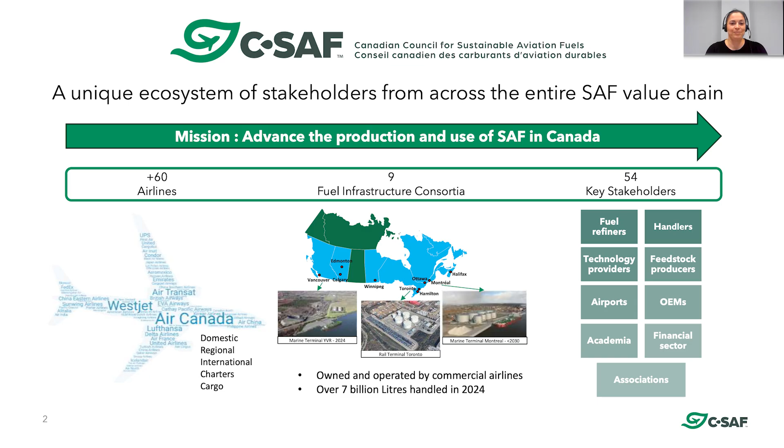So we have what we call our SAF policy North Star, composed of 4 pillars. The first one, obviously, is reducing aviation emissions. In order for aviation to reach net zero goals by 2050, we really need to use SAF, and industry reports have said that at least 65% of emissions will be reduced through the use of SAF.

Our second pillar would be, obviously, to make it here in Canada. We feel we have all the right ingredients, all the right feedstocks, in order to make it. Also important is to keep the sector competitive. I'm sure you're well aware that SAF is more expensive than regular jet fuel—it could be 2 to 5 times more. The airlines obviously don't want to pass on those costs to their consumers, so we want to ensure that any sort of policy revolves around trying to keep the cost competitive.

And finally, activating Canadian feedstocks. That's what the webinar we had yesterday was about, and if you want to know about all the feedstocks we have here in Canada for SAF, you're more than welcome to listen to that recording as well. So that, in essence, is what we're trying to achieve.

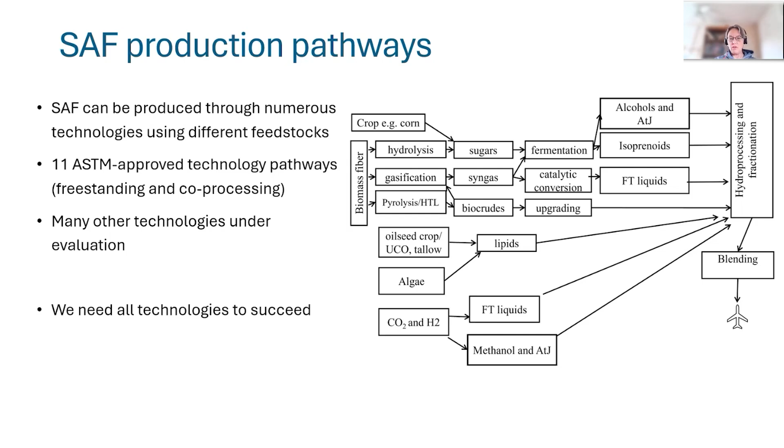So there are numerous technologies. We do have these complicated graphs, but it doesn't even tell the whole story because there's ongoing development of new technologies, and there aren't any winners. We need all technologies to succeed. These are the ASTM approved pathways, and later on I will show you some of the emerging pathways.

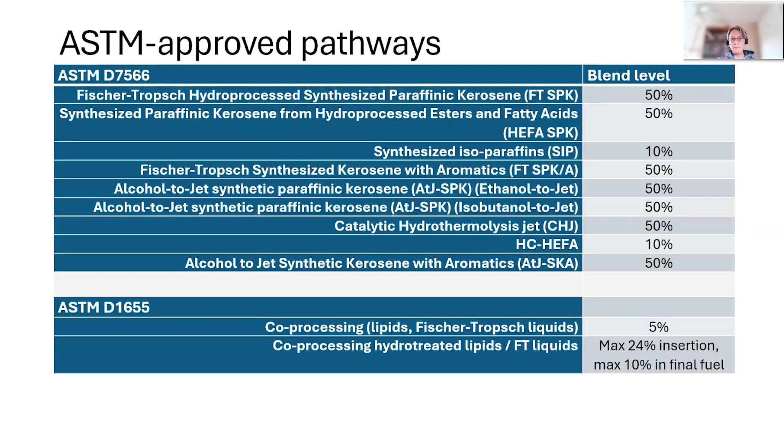I wanted to speak a little bit about technology readiness and commercialization, because ASTM approval is not an indication of commercial status or the sustainability of a pathway. What we see in the SAF sector globally is that it's taking longer for companies to reach commercial status, and we know it has to progress from R&D, pilot, demo, to commercial.

But the timeline, I think people overestimate how quickly this can be done. Usually you would take between 2 and 3 years per stage. And then, often reports start counting capacity based on announcements, but the timeline and complexity in the steps actually takes much longer.

Just as an example, the Fulcrum facility already announced in 2006 or 2008 that they were going to build this facility. So that gives you an idea. Then apart from getting the funding, etc., going to FID, the construction periods can be very long, especially for facilities such as gasification.

So there's also the announcements versus FID. And then we talk about commercial scale, but there's a difference between a first of a kind facility, the pioneer, and fully commercial, the nth facility.

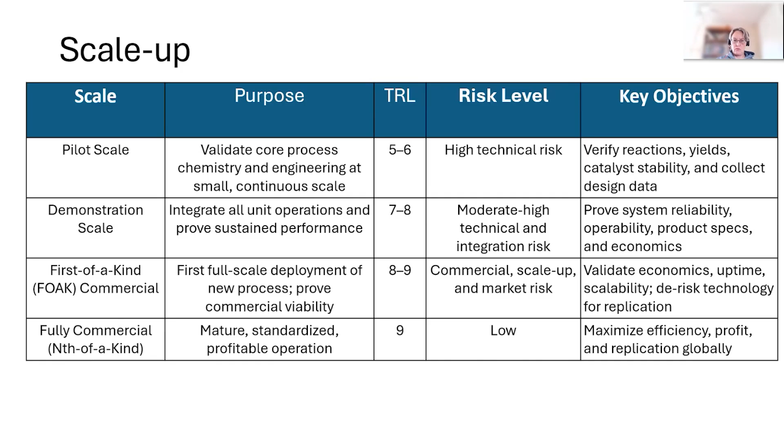If we just look at scale up and these different levels, a first of a kind facility, I do not call it fully commercial because it's still proving the commercial viability. Fully commercial is really at the nth stage, where you have a mature, standardized operation, and the risk in terms of obtaining financing is also very, very different.

And what we also have to bear in mind is that a pathway consists of different processes, and individual process steps may be novel and at different TRL levels. And not only do the individual processes have to be demonstrated, the integration must be demonstrated. And if there's a step that is a lower TRL than others, we would usually assess it at the lower TRL because there's also an integration readiness and a system readiness level that should be evaluated.

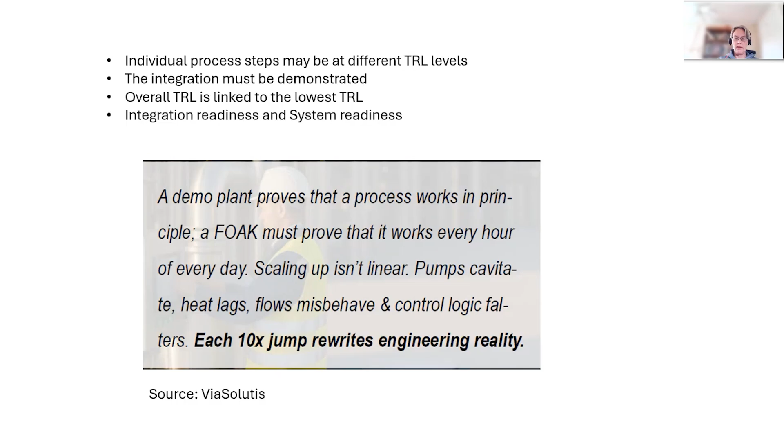And I saw this quote the other day, which is very appropriate. And it said, a demo plant proves that the process works in principle. But the first of a kind must prove that it works every hour of every day, and the scale up isn't linear. And sometimes we forget, financiers, venture capitalists, they put a lot of pressure on these companies to do it as fast as possible. And that kind of is something we have to be cautious about.

So I'm going to talk a bit about the technologies, but not going to go into a lot of detail. You'll be able to get the slides afterwards. The only technology that's currently fully commercial is the HEFA SPK from oils, fats, and greases. But while we say it's fully commercial, it's mostly for production of renewable diesel, not for SAF. SAF can consist of a small fraction of the products, but not every facility produces SAF. I think I mentioned yesterday that there's about 20 billion liters of global capacity for HEFA refineries, but there's only 1.3 billion liters of SAF produced from that 20 billion liters. There are big challenges with feedstock cost, availability, and sustainability.

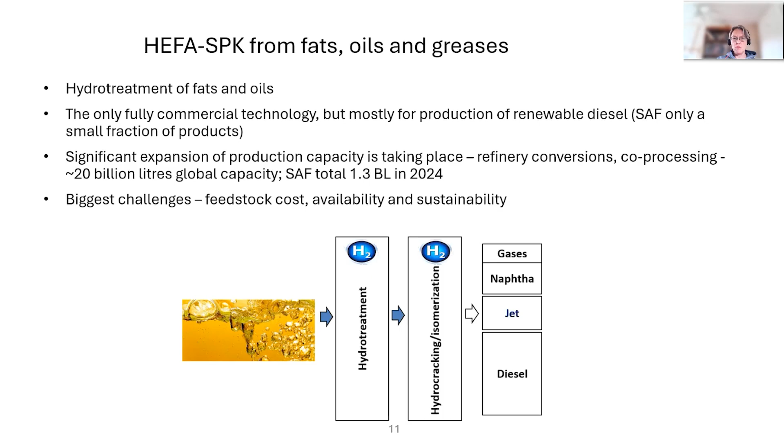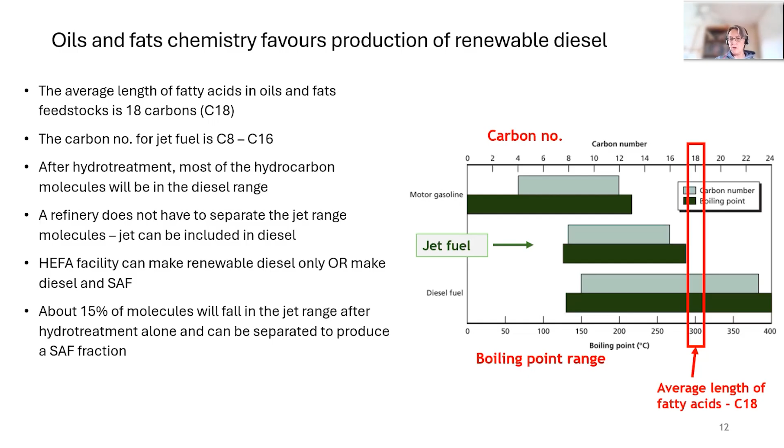But if you want to produce a bigger volume of SAF, you can crack these molecules to make smaller molecules, and then you will have a bigger jet range. But the traditional thing is that you will then lose about 10% yield, so it's only if the economics is favorable that you will do that. And that economic driver will come from the policy, because there's policies all over the world for diesel blending, but not necessarily for SAF. And there are incentives for diesel and renewable diesel blending. And therefore, it's more favorable for companies generally to produce diesel rather than SAF. So I just wanted to clarify that.

So HEFA still has a lot of potential, but the challenge is the feedstock. So if we want to make more SAF, the first sort of low-hanging fruit is increase the SAF fraction, bring in policies that address this competition between renewable diesel and SAF so that we can produce bigger SAF volumes. We also have the opportunity for co-processing, which is also a low-hanging fruit. But again, I'll show you with co-processing that it's the refineries in Europe that are producing SAF with co-processing because of the policy environment there.

So we have the oils and fats feedstock, but they are very expensive. Used cooking oil has been going even above the price of rapeseed oil, and feedstock cost is about 80% of OPEX. So this feedstock cost therefore presents a challenge in terms of the final production cost. And while we have low carbon intensity feedstocks in waste oils and fats, there's only about 30 to 40 million tons. Plus, there's competition not only with renewable diesel, but also with biodiesel.

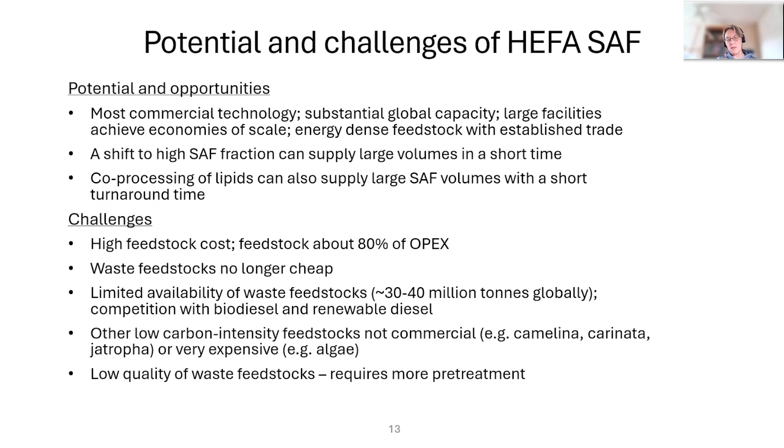So we can use crops such as canola and so on, but there is an opportunity to increase low carbon intensity feedstocks based on cover crops, intermediate crops, such as Camelina, carinata, or crops that can grow on marginal or degraded land, which means that there's no ILUC value attached. So co-processing fits in with the HEFA pathway because this is already fully commercial.

So basically you take your oils and fats and you can insert it in various places within your refinery: hydrotreater, hydrocracker, or even the fluid catalytic cracker. But you'll remember yesterday when we talked about the CORSIA defaults, there's only a default pathway for the hydrotreater or the hydrocracker, not for the FCC. And currently the ASTM limit for the volume that you can insert is only 5%, unless it's already hydrotreated, and then you can put in up to 24%, but still you only can get 10% in your final fuel.

And some of the things that come in here from the sustainability perspective is that the biogenic content in the final jet fuel, the final SAF, has to be demonstrated. And while you can use mass balance and so on, CORSIA determines that there has to be carbon-14 analysis built into that to verify the blend. And only the biogenic component is considered SAF.

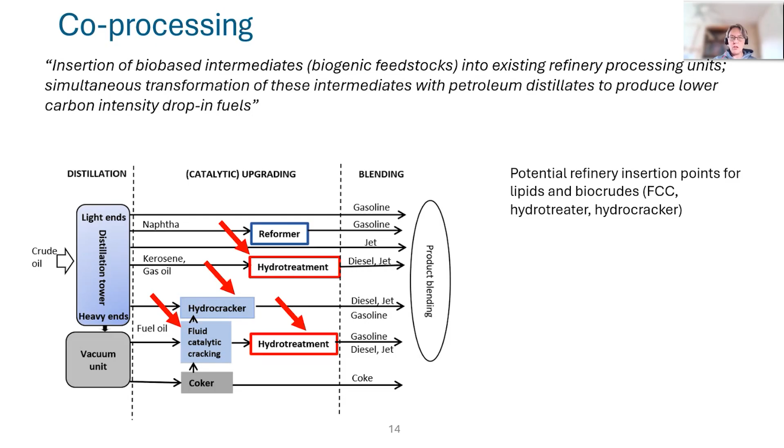So there's a lot of potential for co-processing because there's a much quicker implementation because the refinery is already there, the processes are already in place. It might just be changing the catalyst, building storage capacity, piping, and maybe pre-treatment capacity. So this is a very quick way to produce SAF. The other reason why it's mainly in the EU is because a lot of facilities in North America have been co-processing for a long time, but at much higher volumes than 5%. So dropping back to 5% is not necessarily an economically viable process.

So in Canada, just to link this back to Canada, co-processing is extensively carried out in BC at the Parkland refinery, mainly in the FCC, but also a little bit in the hydrotreater. And then the Tidewater Midstream facility in Prince George does co-processing. And then a full HEFA facility is the Tidewater Renewables facility in Prince George, but they are only producing renewable diesel. They want to expand to SAF production, and they have not yet gone to FID on that process.

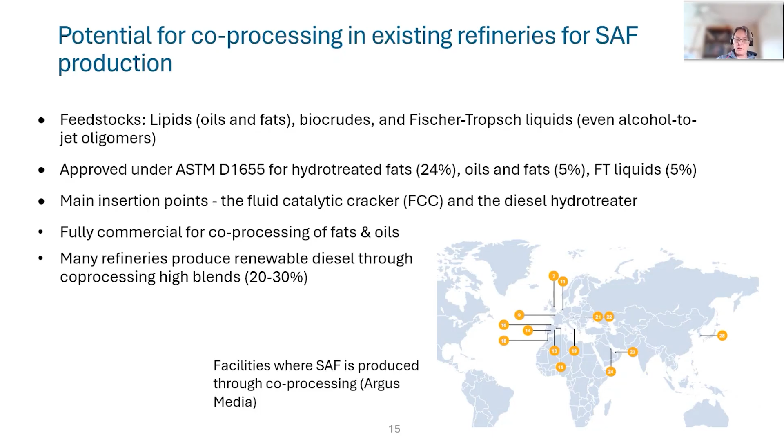Then gasification. So we looked at the feedstocks yesterday, and gasification is very, very promising in order to utilize a lot of the feedstocks. Here I've got forest residues and MSW, but it can also use ag residues and so on. The basic process is quite known, but what we do know is that gasification is fully commercial for generating heat and energy, and Fischer-Tropsch is fully commercial for producing products from gas, natural gas, and coal, but not from biomass. And so it's that integration that is the problem, because the biomass produces tars, the syngas cleanup and the ratio, all of that becomes more difficult when you're looking at bio-based feedstocks.

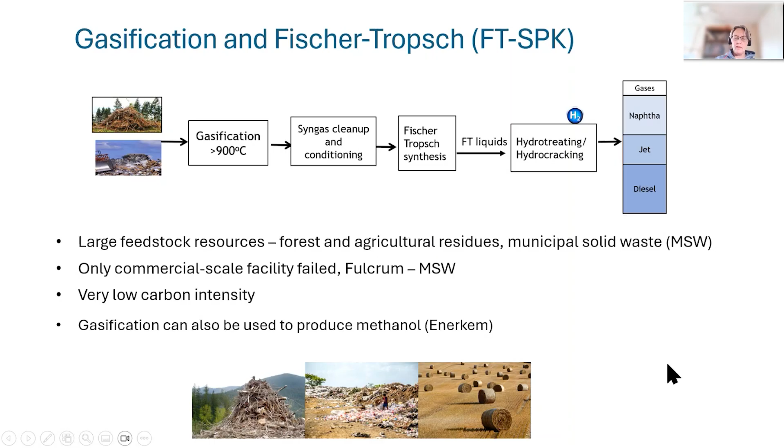But it's critical that this technology must be commercialized because we have vast feedstock resources that other technologies cannot readily utilize. But the problem is that it's still not commercial. The first of its kind facility, Fulcrum, using MSW, closed down earlier this year. And so that is very disappointing, but that means there's now a greater risk for this technology. But it can produce very low carbon intensity. And the alternative to Fischer-Tropsch is to produce methanol and then use the methanol-to-jet conversion process.

The difficulty is that the capex is very high, anything from greater than 1 billion to 4 billion US dollars. There is complexity with syngas cleanup, and there are huge differences with feedstocks. If you look at the Fulcrum facility, there wasn't a lot of information available, but one of the things was that they had a 10-foot layer buildup of cement-like material in their gasifier. And this is likely to be due to high ash content in MSW that can be up to 24%, and not necessarily controlling the moisture in the feedstock, which then creates this environment that was problematic. They also had problems with nitric acid forming because of the feedstock characteristics.

So it is very critical that you have strict feedstock specifications, not just for size, but for moisture content, and that the contaminants are removed or clearly known, so that piping and so on is of the standard or quality that can withstand the type of corrosion that you might experience. So yesterday someone asked about the yields. I said 18% distillate per ton.

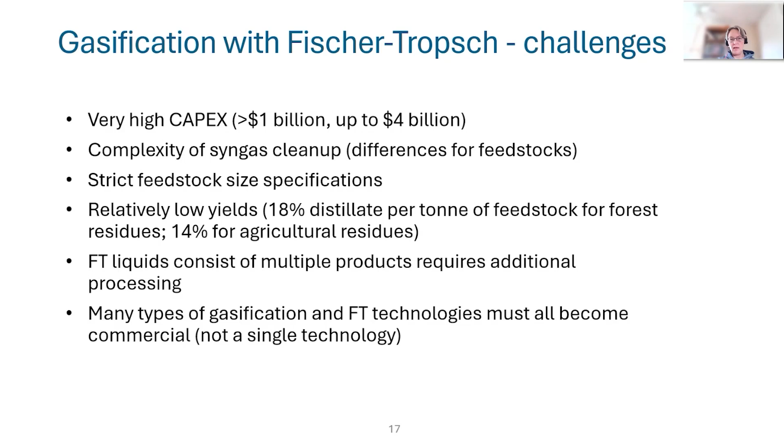So alcohol to jet, it doesn't have that much potential in Canada, but direct thermochemical liquefaction does. And this is three basic processes: fast pyrolysis, catalytic pyrolysis, and hydrothermal liquefaction. And at UBC, we've been looking at this process and thought this has a lot of potential as far back as I think 2014, and we've done various projects funded by Boeing to look at this.

You produce this liquid intermediate and then you have to upgrade it. So the liquid intermediate, I think you're probably not seeing my pointer. The liquid intermediate, this is for fast pyrolysis at commercial level, HTL not quite there, but it's this part that's the problem, the upgrading, because of the complexity of the oils. It's quite difficult, catalyst inhibition and coking and so on.

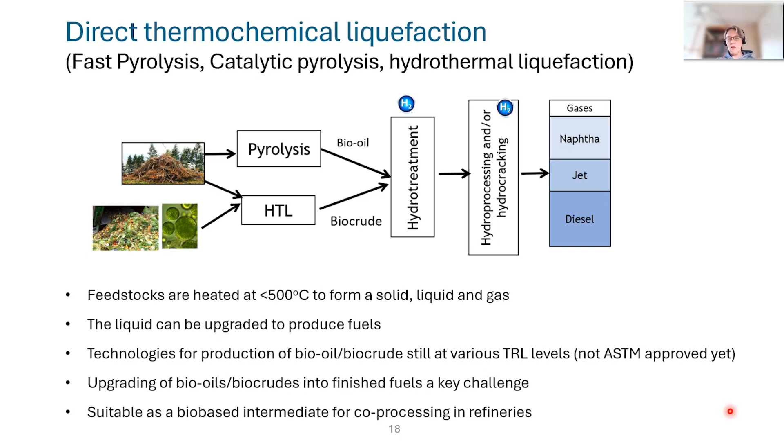But what is important also is that this can be a logical next step for co-processing because you have a bio-based intermediate. But the problem is it's not ASTM approved yet, but it has significant potential. And if you look at hydrothermal liquefaction, it can use niche feedstocks and so on. And as we talked yesterday as well, the waste tire pyrolysis oil, which is in the process for approval for co-processing for SAF production.

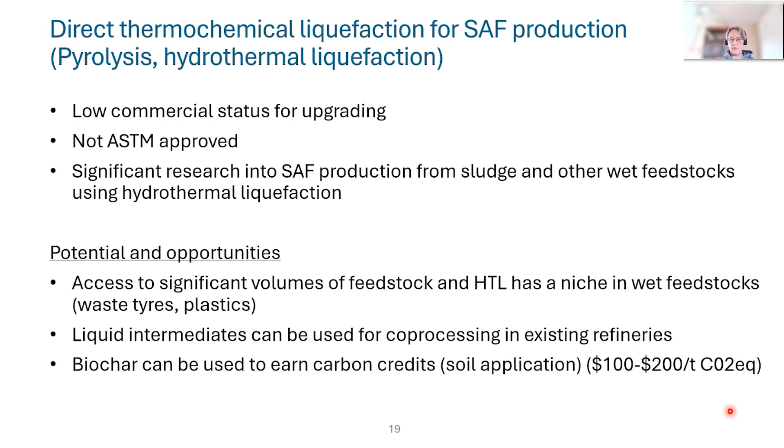And one of the things with some of these first of a kind type of facility is how do you make money while you are trying to optimize the process? And biochar is becoming really big for carbon credits, which could have a lot of potential. But as I said, there's still significant technical challenges with the high oxygen content, low pH, water content, high nitrogen, high hydrogen requirements for upgrading.

But if we look at Preem, for example, they have been co-processing fast pyrolysis bio-oils from the Pyrocell facility based on the BTG technology. And they're putting that in the fluid catalytic cracker. Still not optimized, but they also started co-processing waste tire pyrolysis oil. And because it doesn't have the high oxygen content, it seems to be easier.

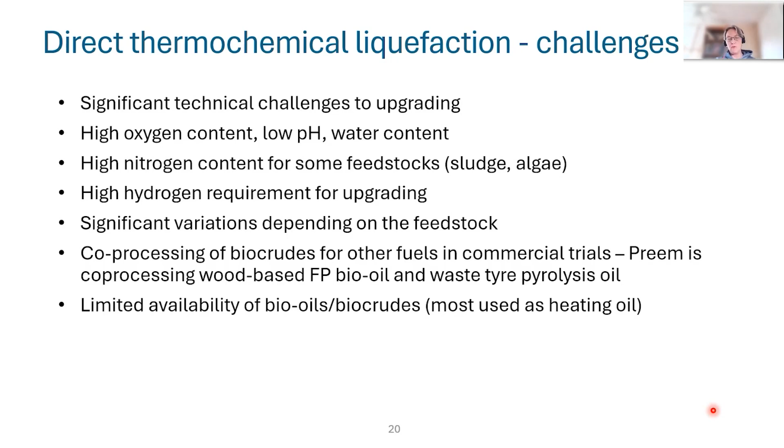But for the moment, most bio-oils are being used as a heating oil replacement because you don't need high quality product. And there's also significant interest to use it for marine shipping fuel because the engines can also tolerate lower quality fuels.

The alcohol to jet, I'm just briefly going to refer to this. As we know, you get alcohol produced from lots of crops, which is fully commercial. Cellulosic ethanol, yesterday I spoke about that, and that's struggling to be economically viable at a commercial scale. And then there's a third way of producing ethanol, which is waste gas or syngas fermentation, the LanzaTech process. And there are multiple types of alcohols that have been approved, but ethanol is the main one that is being pursued.

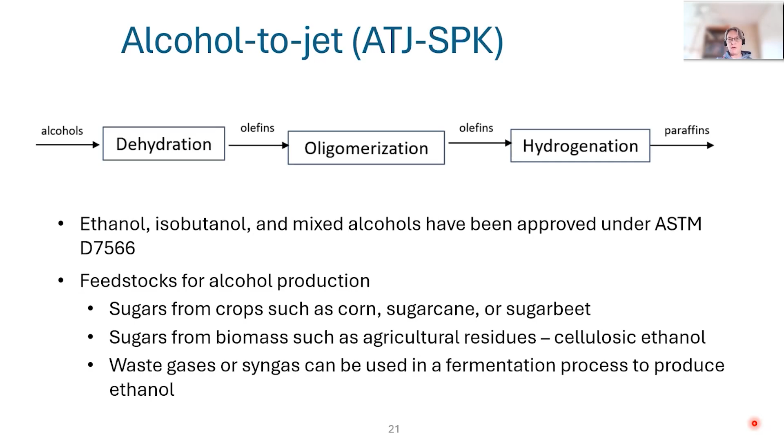There are GEVO, the isobutanol process, the Swedish Biofuels mixed alcohol process, and also Global Bioenergies, the isobutene process. So there are multiple options there, but the commercialization so far is mainly looking at ethanol to jet. But butanol and methanol is also in the pipeline, and this could open up, because methanol would logically come from a gasification syngas, or it can come from biogas to methanol to jet. So that gives it different kinds of options.

Methanol is also considered for shipping. There are already engines that can operate on methanol. So there are different fuel options for these.

So when we look at the alcohol to jet commercialization, we know that the LanzaJet Freedom Pines facility, the official opening was January last year, but they only completed construction, I think, in September last year. But they're still in the commissioning phase. I think I read just in the last few days that they are starting to produce small volumes of fuel, but they are taking the commissioning stages slowly in order to make sure that everything is working properly.

If you just take the alcohol to jet part, the SAF, ICAO SAF rules of thumb show you that it's significantly lower capex than, say, gasification. And ultimately, it doesn't matter where the ethanol comes from, it's all chemically identical and can be used. There are also established supply chains, and sugarcane ethanol has a very low carbon intensity. So most of these alcohol to jet processes can produce anything from 70 to 90% SAF fraction, but they can also tailor it to produce more diesel fraction and also more naphtha, depending on the processing and the economics and the market.

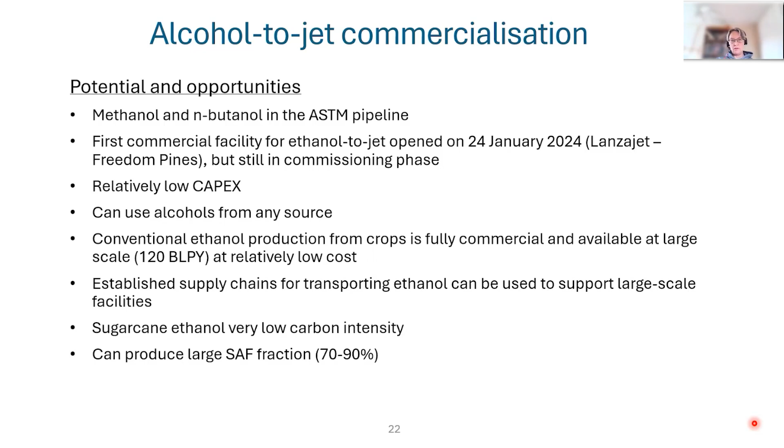The challenge really with alcohol to jet is the availability and cost of second generation advanced alcohols, because this is not sufficiently commercial. As I mentioned yesterday, only Raízen in Brazil is producing commercial scale cellulosic ethanol from bagasse. So that's really what we need to look at, and where we need to make progress.

My study in India recently highlighted that the vast majority of the feedstock available in India is rice straw, and they can produce more than enough SAF for all of India's jet fuel consumption, and then export more. But the critical thing is getting the cellulosic ethanol from rice straw to become commercial, because it's even more difficult than from bagasse.

The LanzaTech process, they either directly use industrial off gases, say from a steel mill, which is their main demonstration, but they can also take a feedstock, use gasification to produce syngas, and then ferment the syngas. So they are looking at various options, and in India, there's a small facility currently that was opened at the Indian oil refinery, where the LanzaTech facility is fermenting the refinery off gases.

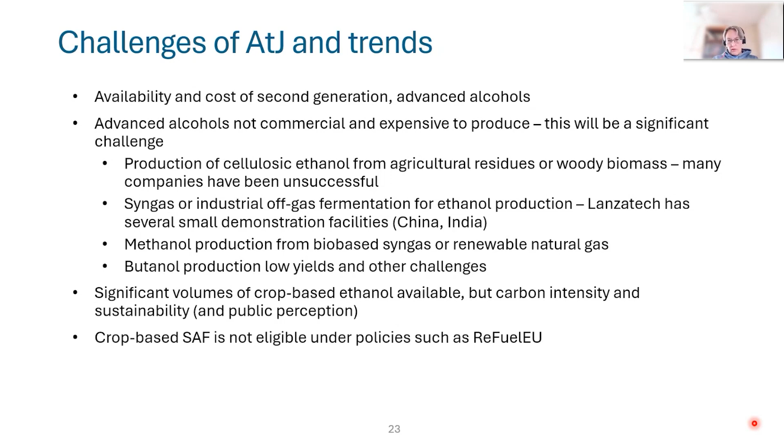Then, as I said, also methanol from biogas and so on. And then power to liquids. So this is still under development, and only small scale volumes are being produced. The high cost is quite significant.

I think a recent study in Europe indicated that E-SAF, as they call it, is probably about a production cost of 8,000 euros, which means that if a fuel supplier does not comply with the mandates, they will be paying over 13,000 euros in penalties. Compared to a HEFA market price at the moment of, say, 2,000 to 2,300 US dollars, there's a significant price difference, which is why most of the interest in developing this is either within the European region or facilities who want to sell into the European region.

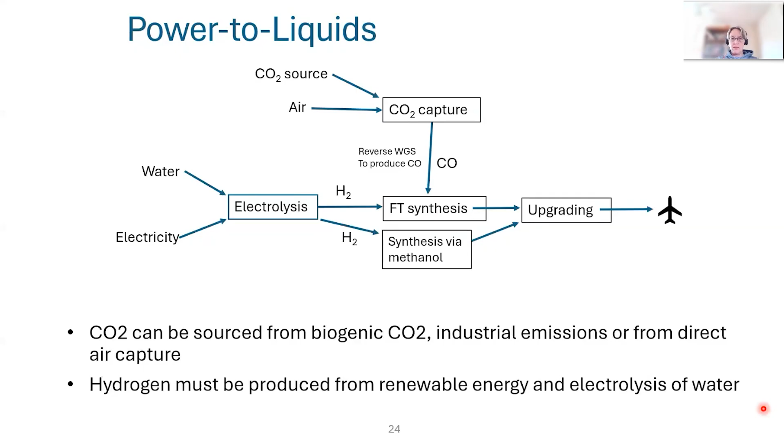There is a possibility that they're looking at hydrogen production in remote areas and then shipping or piping that into Europe. There's even a facility in Chile that produces methanol, which can then be shipped into Europe, and the methanol is acting as a hydrogen carrier, and then they can produce the hydrogen there to supply renewable hydrogen combined with CO for E-SAF production. So there's a lot of options, but expensive and still not at a commercial scale.

But the benefit is really that it doesn't require bio-based feedstocks. For high emission reductions, though, we have to look at where does the CO2 come from, where does the electricity come from, and is it truly additional renewable electricity? There's substantial demand for renewable electricity already, not just for electric vehicles, but for decarbonizing the grid and data centers.

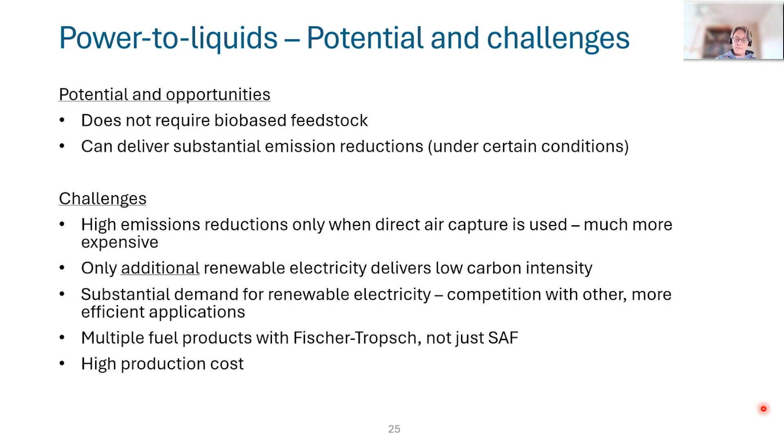So ASTM certification, I'm just quickly going to go through this. We know that there are two ASTM relevant standards. Neat SAF is under ASTM D7566, and conventional jet fuel and co-processing is under D1655. There are blending limits and so on. The SAF, neat SAF, is not identical, but once it's been blended, it is essentially identical.

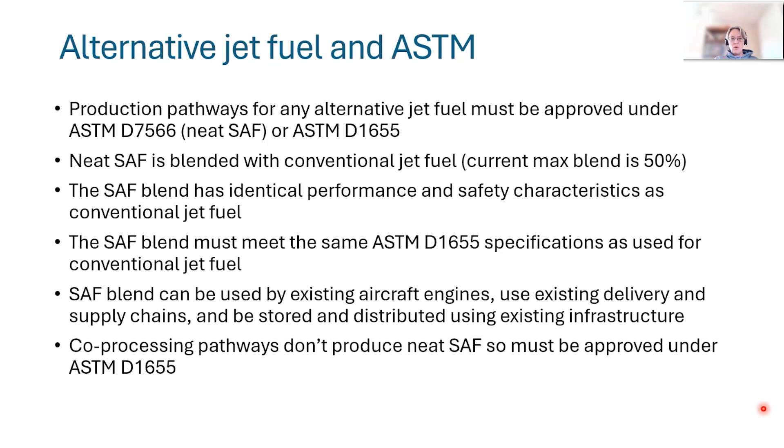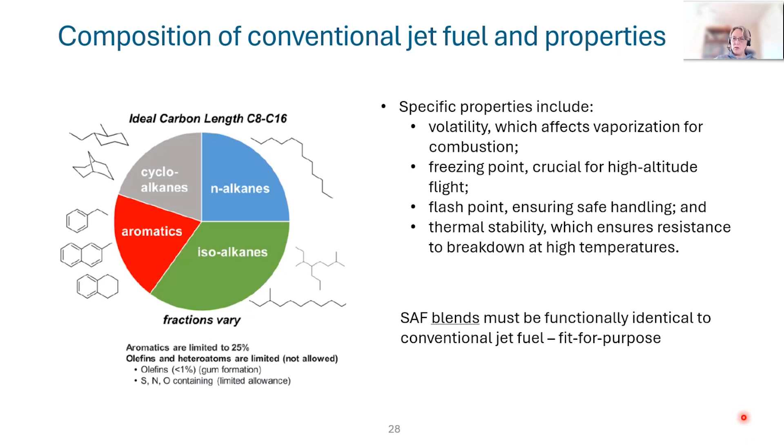So I'm just going to jump ahead. We have a basic composition of conventional jet fuel, and then we have specific properties. The SAF blend does not necessarily have to have an identical chemical composition. It's more that it has to be fit for purpose, so functionally identical in meeting the specific properties. That's the SAF blend, not the neat SAF. The neat SAF might not meet all of those, but once it's blended, it has to meet the same specifications. So the ASTM approval is really about the safety and operability of the fuel, but ASTM does not actually tell you what is commercial or what is sustainable. But of course, a company can't get market access unless there is ASTM approval.

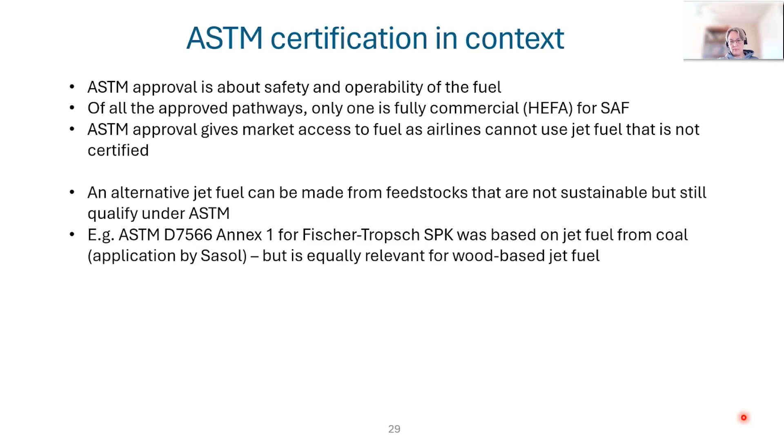So if we just look at the process for certification, there's a very rigorous process described in ASTM D4054. I'm not going to go into that, but it's very comprehensive, and the initial SAF product pathways that were approved took years and years before they were ASTM approved, because there's obviously caution due to safety issues.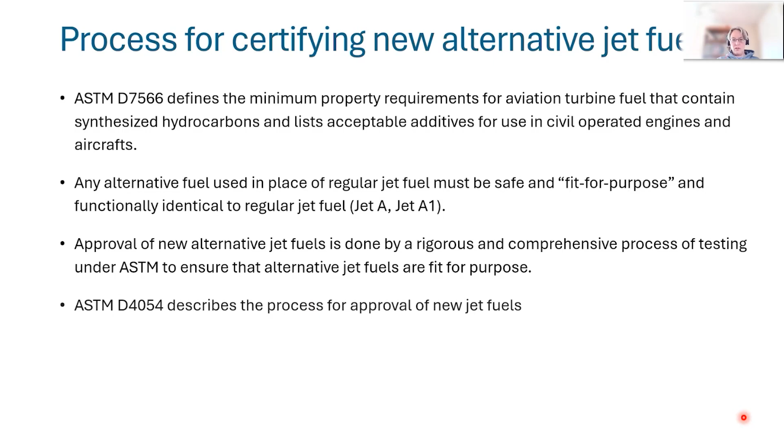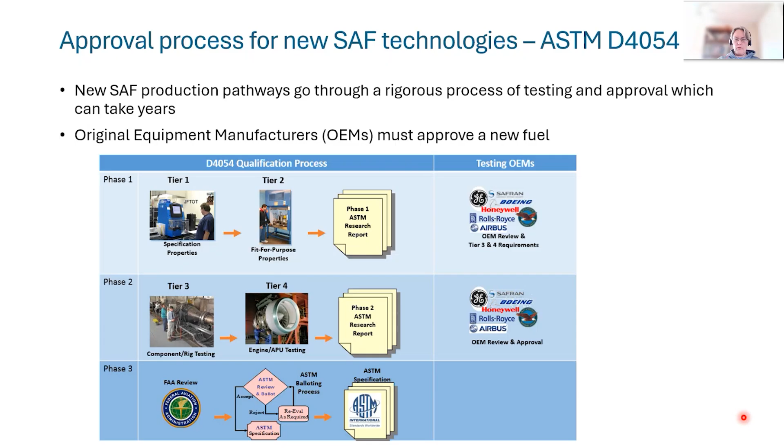The approval process has 4 different tiers and different phases, and OEMs are involved in testing and so on, but it can take very, very long. I remember the GEVO process, the isobutanol to jet, actually cost them something like 25 million US dollars to do this. But there's been a lot of improvement since then.

But there's a lot of improvements, speeding up some of the initial testing. And there's also a fast track process that allows, I think the shortest is like 18 months, where you can get fast track approval, although the blend must then be limited to 10%. Part of the reason one fast track process was approved is that it was still a type of lipid. So depending on the complexity of the chemistry of the feedstock and the fuel, that will also delay how fast you can certify this.

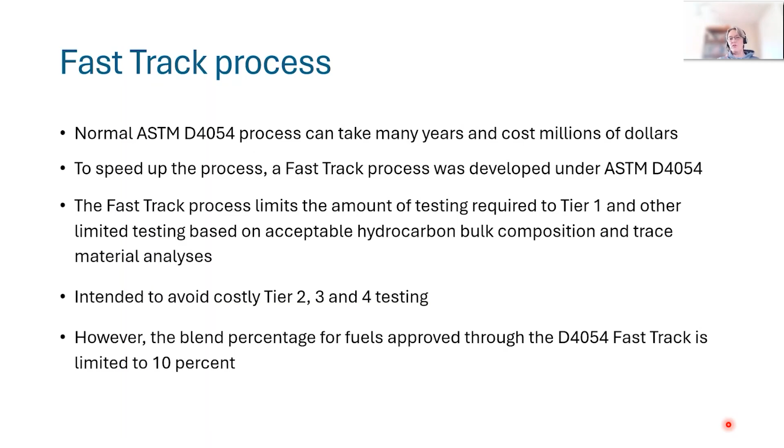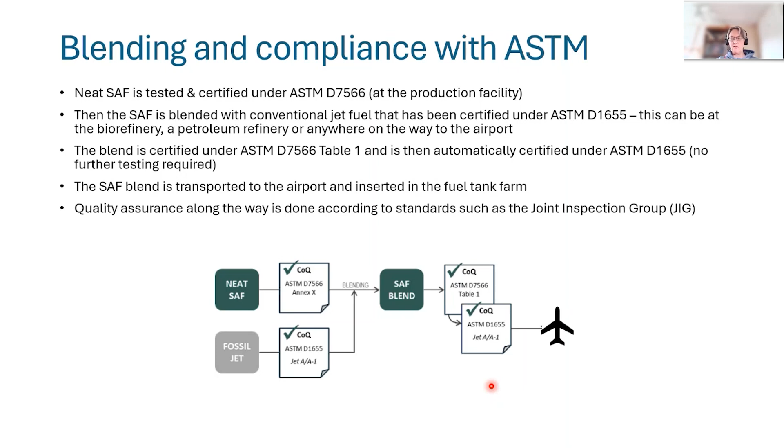Now the blending process, this diagram explains it clearly. So the neat SAF, and I think this is still a diagram from SkyNRG, has to be certified under ASTM 7566, the specific annex. Then it has to be blended with fossil fuel jet that is certified under ASTM D1655. Then the SAF blend is qualified under Table 1 of D7566 and automatically becomes approved under 1655. So when you get to this stage, the blend is absolutely identical and indistinguishable as far as the properties are concerned from conventional jet fuel. That's important to understand. You cannot distinguish it anymore. It's absolutely identical.

But when we talk about fuel certification, there are also quality standards along the whole pathway to the airport. Here we also have different standards, such as on a global basis the Joint Inspection Group standards and so on, that ensure quality control at various stages, and there will be differences for different countries, but at each stage a certificate of analysis must be produced. This is also relevant in terms of Canadian airports and how the transport is going to take place, and testing along the way to make sure the quality is meeting specifications even after transport, for example.

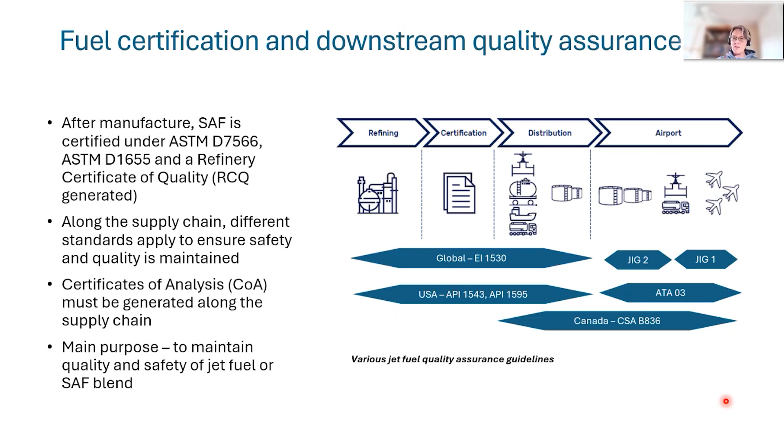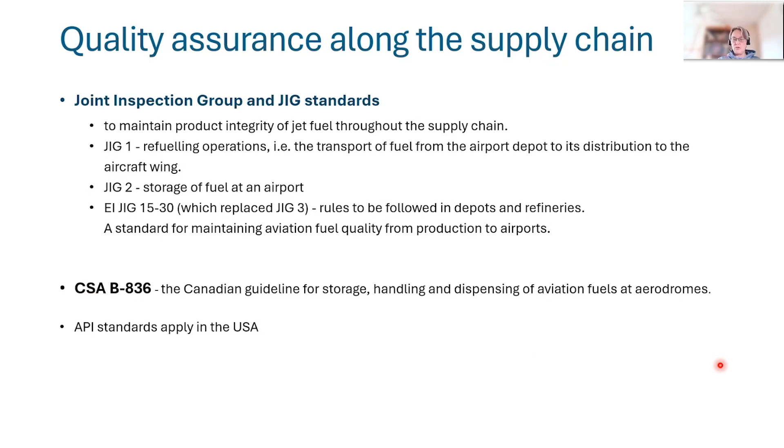And the standards that apply, mainly I'm focusing on the JIG standards because that is applicable globally with some variations. So you have JIG 1, which is for refueling, JIG 2 for storage at the airport. This other one covers rules to be followed in depots and refineries. So that is along the whole supply chain. Then in Canada, you have the standard for storage, handling, and dispensing of fuel at aerodromes. So just to make you aware of those standards.

And then SAF at the airport. Ultimately, we want this to be a cost-effective process. Every single part of the process where we can reduce the cost of the SAF is critical. So the SAF blend can be inserted into the fuel tank farm after it's been approved under ASTM 1655, but the neat SAF can never be inserted into the fuel tank farm. If the neat SAF or a SAF blend is segregated, it can be delivered into one aircraft only. This is usually just done for demonstration flights, but ultimately we want the SAF blend to go into the fuel tank farm.

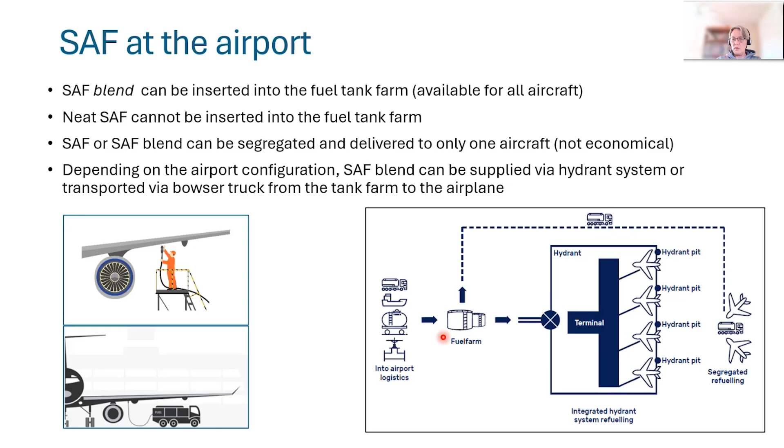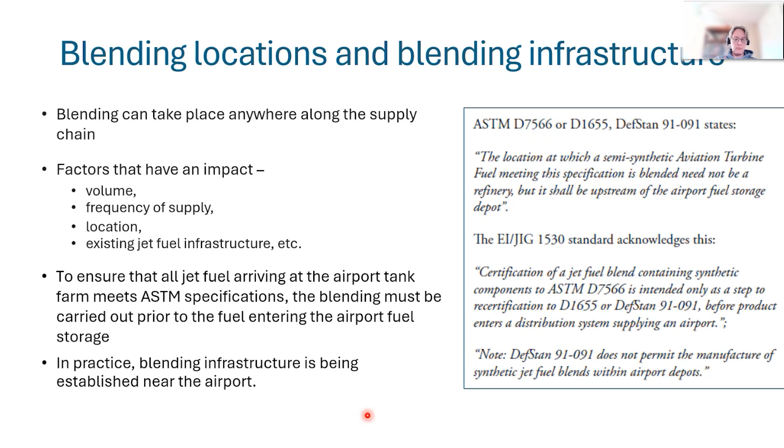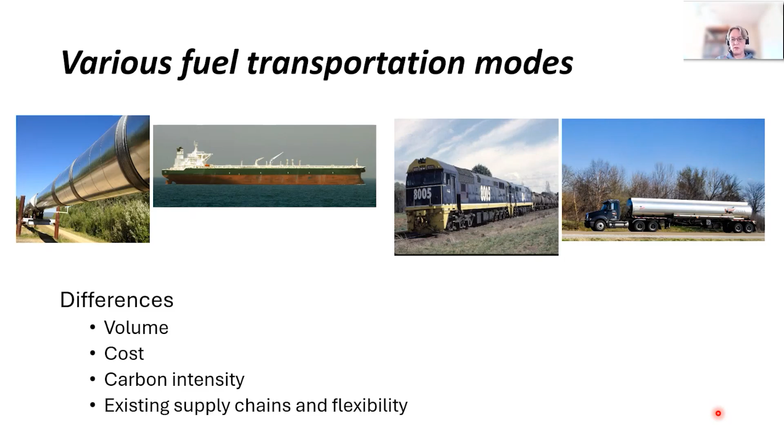But we can't preempt all the different ways the market will sell and transport fuel. Logically, we want the most economical transport, which would be by pipeline, then ship, rail, and tanker—tanker being the most expensive with the highest carbon intensity. It all depends on distance, existing supply chains, and flexibility.

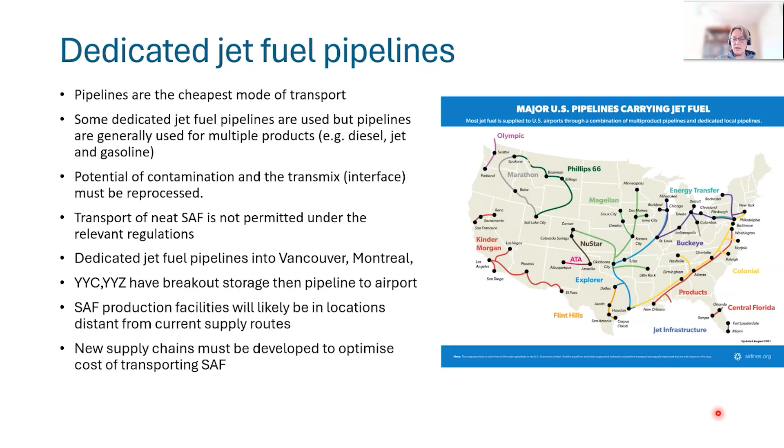There are lots of pipelines everywhere, but many only transport crude. Some pipelines transport different types of products, but we have to realize you cannot transport neat SAF in a pipeline—it has to be blended first, then it can be transported by pipeline. If you have multiple products there will be some mixing, so some of that will have to be reprocessed. Completely new pipelines or supply chains will likely have to be developed, because SAF production is likely to be in locations distant from existing supply.

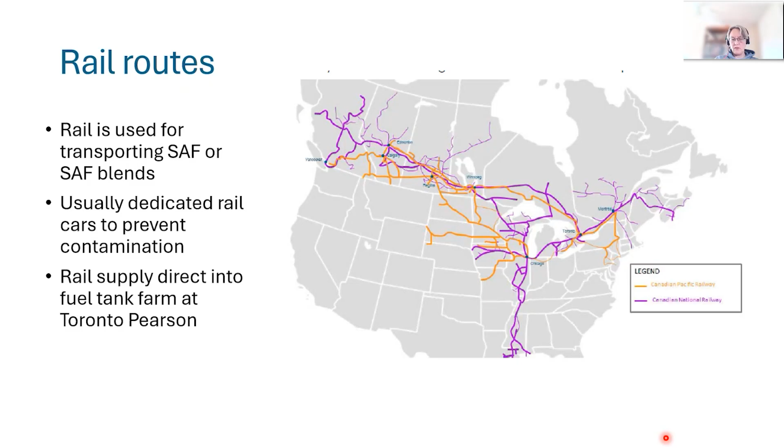There are also multi-product pipelines. Shipping has very low carbon intensity and is already used—there are river and barge routes, and jet fuel is already supplied along some of these. Rail plays an important role in feedstock supply already, but if you're transporting jet fuel or SAF blends, you usually need dedicated rail cars to avoid contamination.

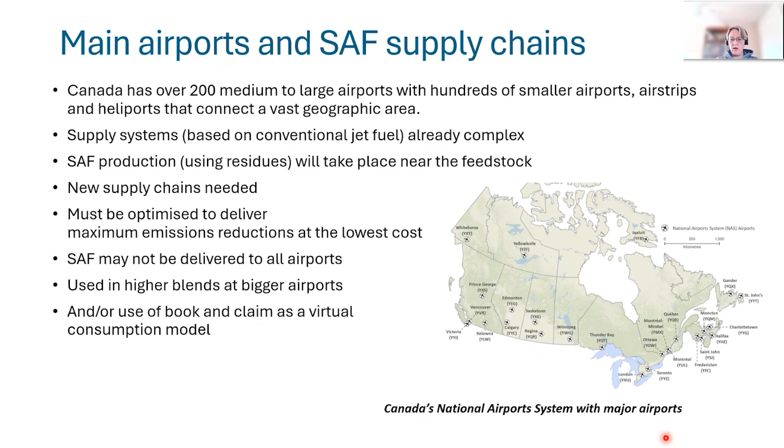Canada has over 200 medium to large airports. We can't probably deliver to all of those, but as blends become higher and higher we may be able to just deliver to the larger airports. There's also the option of book and claim—I won't go into detail since I'm running late, but there's a bit here on current supplies at the airports.

What is book and claim? It basically means you separate the physical fuel from the sustainability characteristics—you can put the physical fuel into an airport but use the sustainability claim elsewhere. So Air Canada or WestJet can buy fuel in Los Angeles and claim it at Toronto Airport or Calgary Airport. That's basically it.